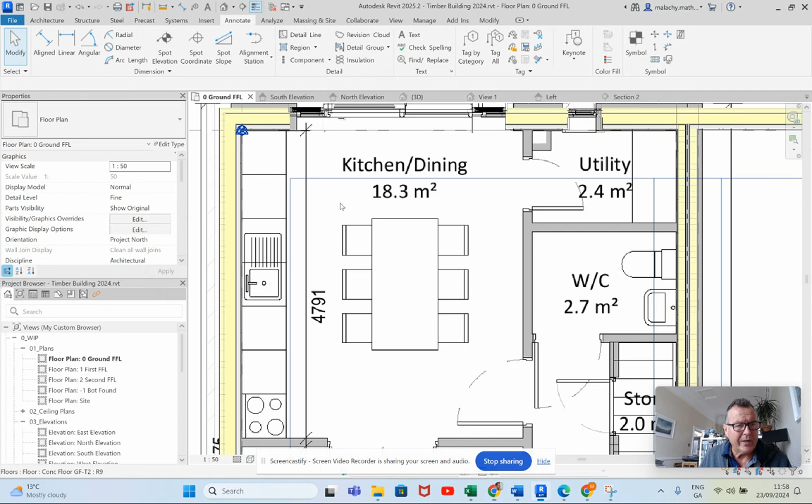Now I'm going to have a go at completing the ground floor here, so I need the internal walls and that as well. Just to let you know now, I've moved the PDF back into its position and I'm in wireframe at the moment, okay, so I can see down below the floors. I changed these windows to 450s. I changed this window to this Nordan one because the other one didn't have a sill and was annoying me.

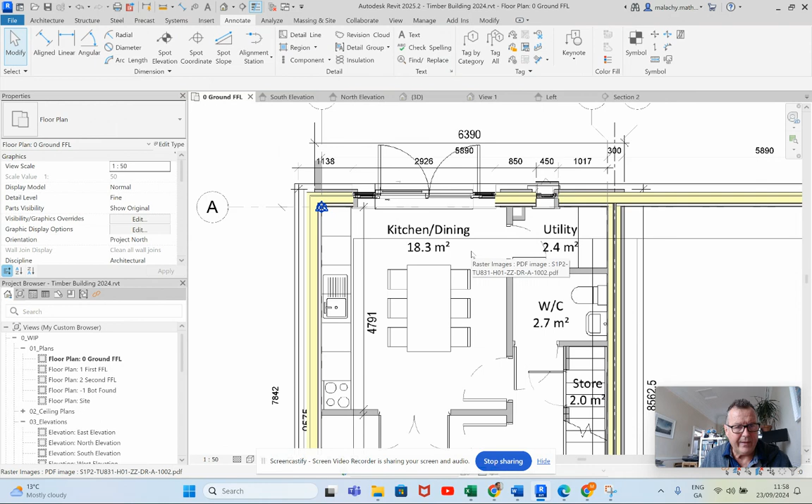Okay, that's that. Now, before I do the internal walls, I might put in the first floor here. Okay, so I've taken a dimension there, 2778. So I'm going to use an 18 plywood on top of a 200 zone for my joists. Now, they could be solid timber joists, or they could be open web, or whatever you decide to do here.

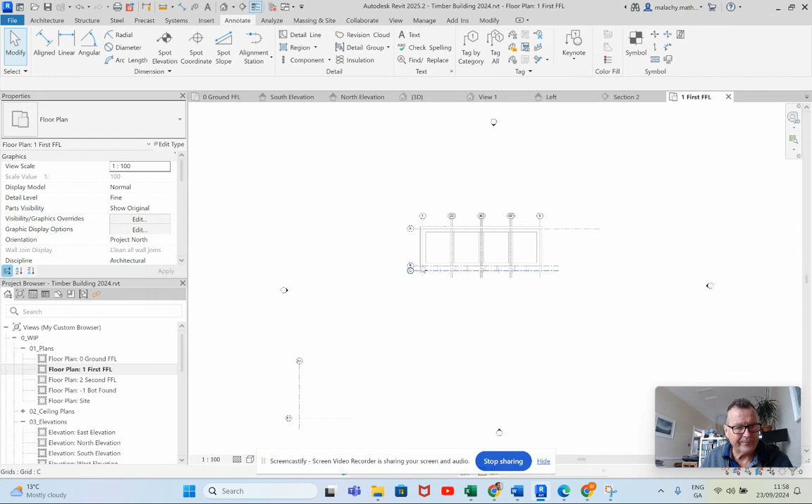So I'm going to go into the first floor plan here. Okay, and again, this is where my grids on the internal face come into their own. So I'll go into architecture and floor. Now, timber suspended floor, edit type. I'm going to duplicate this one, and okay, I'll just call it that.

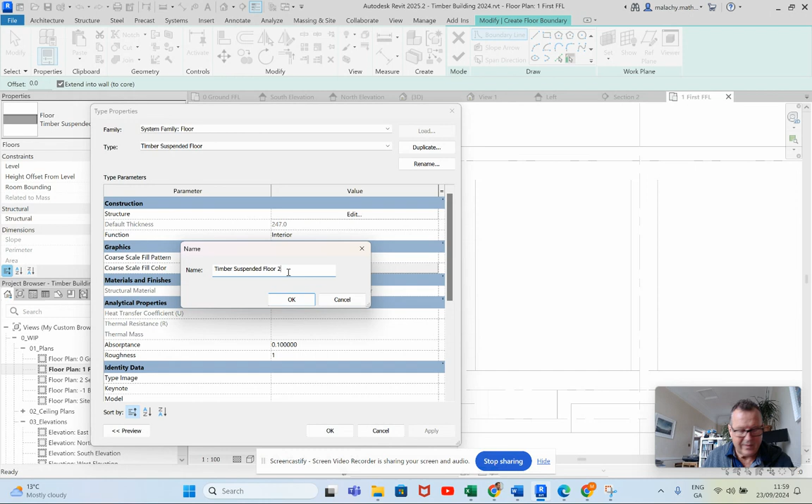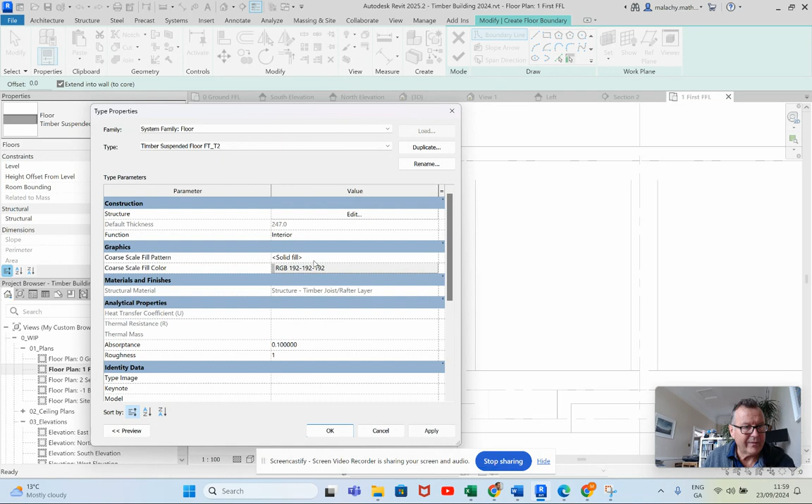Actually, I'll give it a, so it'll be floor type underscore T1, T2, which would be, shouldn't it? Okay, floor type T2. I'm going to change the coarse scale color to here, solid fill. Wood sheeting, I'm going to pick a plywood here, and I'm going to my HBA, HBA plywood. Okay, that's that one. It's going in at 18.

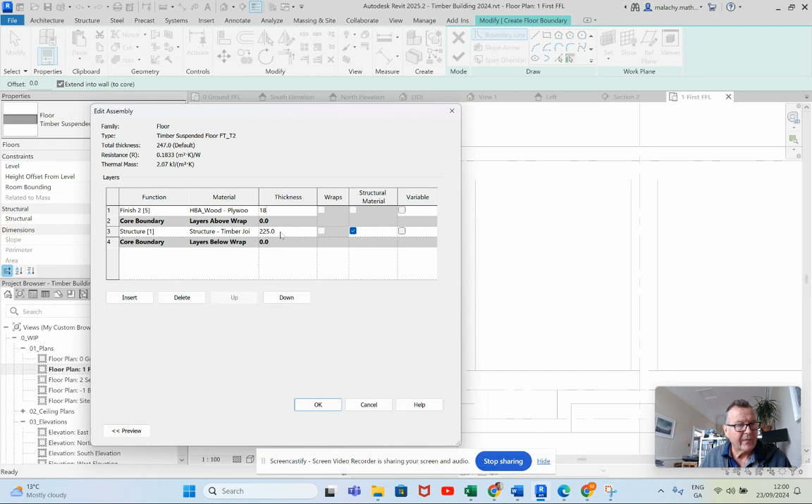And then this is going to be a structural timber zone of 200. Now, notice that I'm not putting in a plasterboard underneath that because I'd be putting in a ceiling, and the plasterboard on the underneath of the floor will not host lights, whereas a ceiling will host lights. If we get to that point of putting lights in, that's where that will come into its own.

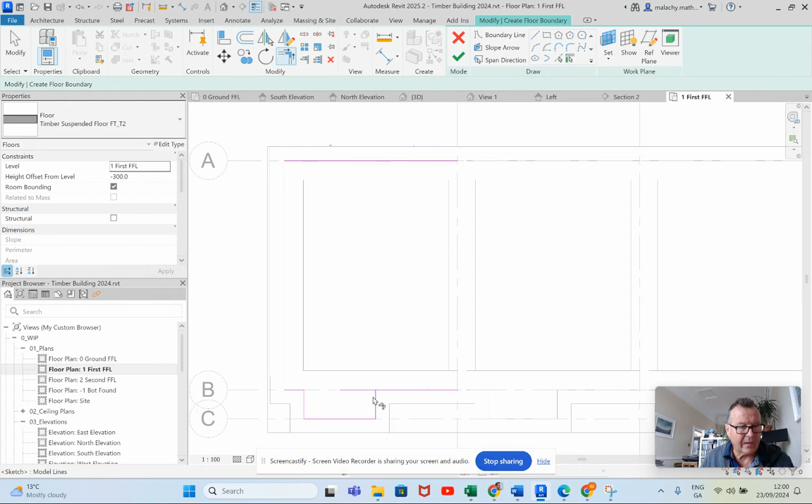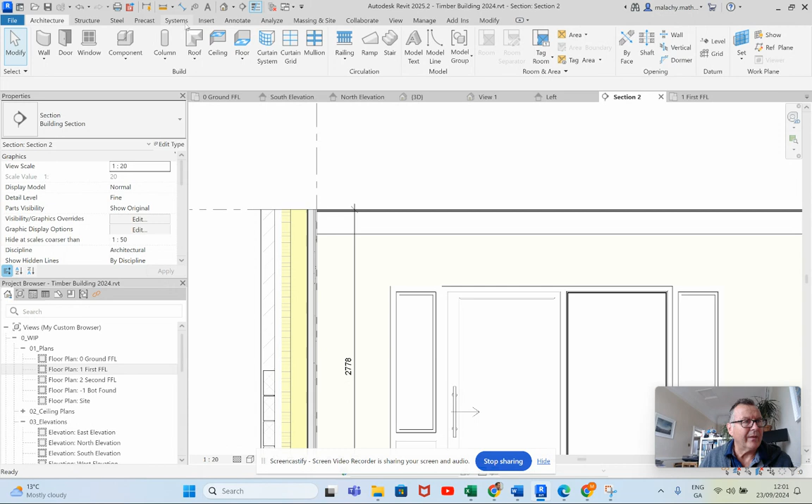Now I'll have to do a cutout here for the stairs, but don't attach. Okay, back into my section here now. Let's take a look at that. Right. Oh, I didn't change the dimension here. That's no problem. I'm going to align that now. Do this, align the top of that. There we go. Now let's just do a check on that. Just annotate. To the underside is 2560. That's grand, gives me plenty of height to play with there.

So that's that one. Now the reason I'm doing that is that this 2560, that is going to be the height of my ground floor walls. All right, so we go into wall here, and we'll pick up an internal partition stud. Okay, so I'm going to pick this one, edit, I'm going to duplicate, and I'm going to just check in here. So one plasterboard 75. Okay, so that's going to be 100 mil in total.

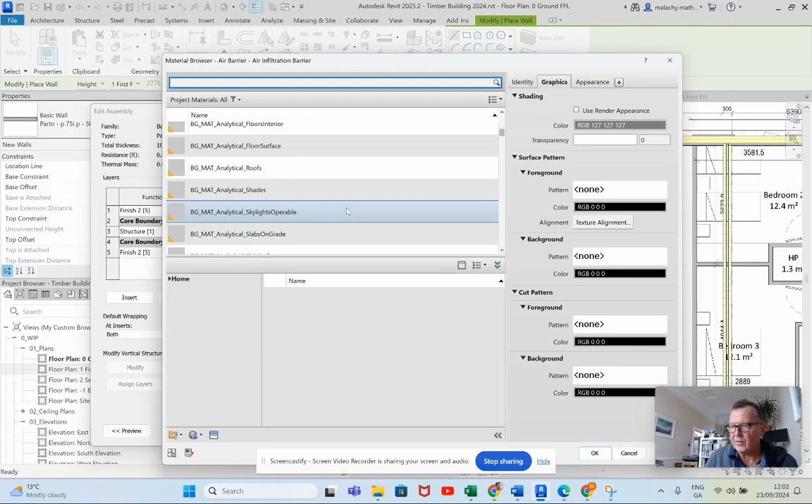Rather than air infiltration, I don't know why that happens in there. We're going to make a wood stud layer, and that has my yellow in it as well, because we probably will insulate this as well too. And while I'm at it, I'll change my plasterboard to my HBA plasterboard as well. HBA plasterboard. Okay, and this one will change as well.

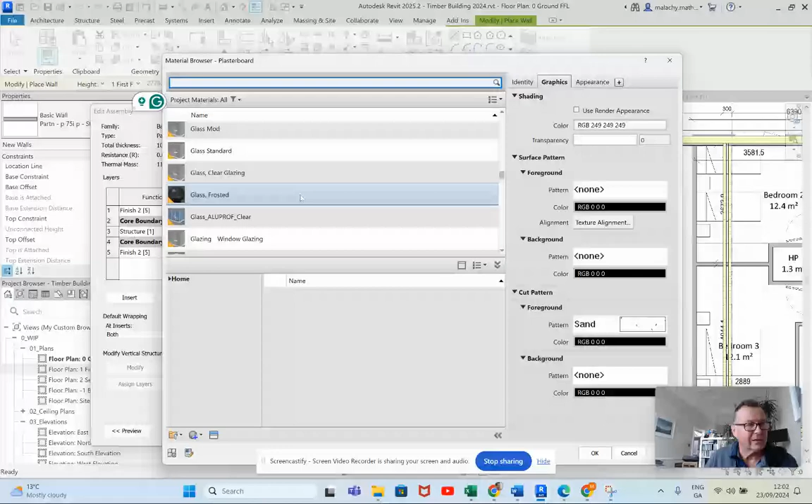You can see that a lot of time is taken up with setting these things up, and one of the secrets of Revit is, again, having all these already made, so they just need to choose them and get straight into the modeling. And that's where your template comes into its own.

And I know you're doing an exercise with Tom at the moment in which you're building your template. We do that specifically so that you have the skills now to develop your own template with your own walls, with your own floors and everything else like that, with all of this kind of stuff already set up, so it's not taking up modeling time as such.

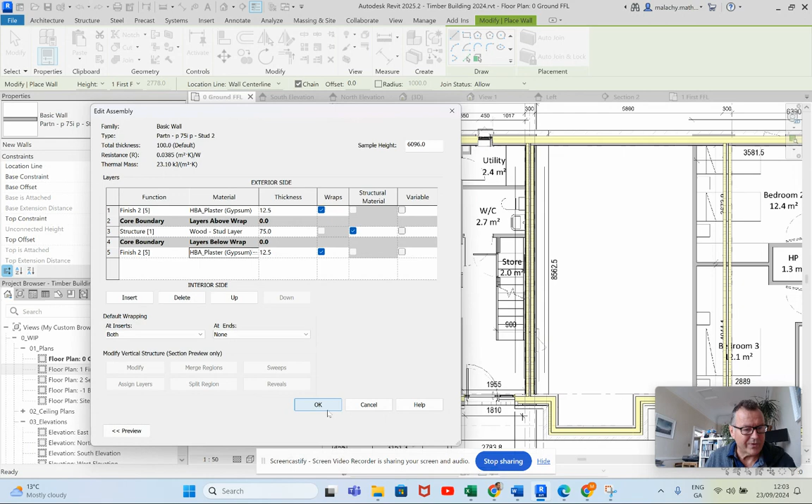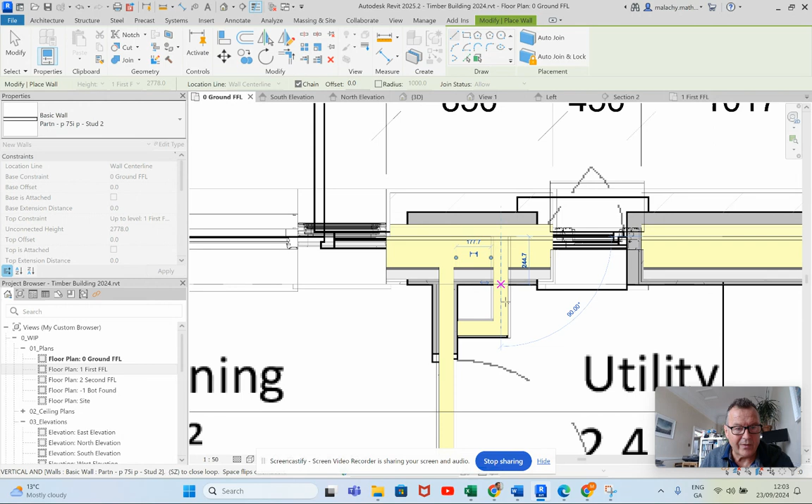Okay, that's good. Now we'll do wall center line here just for the moment, and I'm just going to lash these in. Now let's just get in as far as there. I'll come back to that. It's penetrating through. Okay, so we need to do that. That's just a little service corridor there. Across here, I like to get these in, and then I'll put some dimensions on it, and I'll adjust from there.

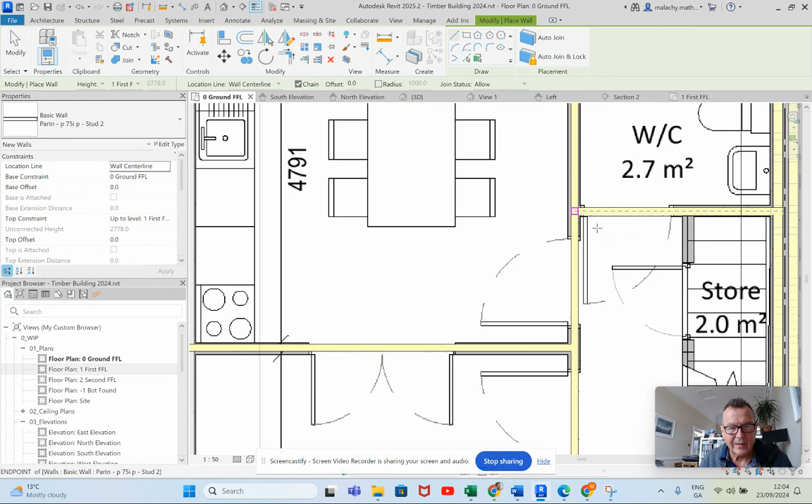Okay, escape ones. Now this is one that will more than likely change because it'll depend on the position of the stairs as such. Yeah, I'll go the whole way with this. I will have to adjust that one, I know. Now there's all my internal walls in. So escape. Now I don't think that's going to happen here, so let me just check this to see.

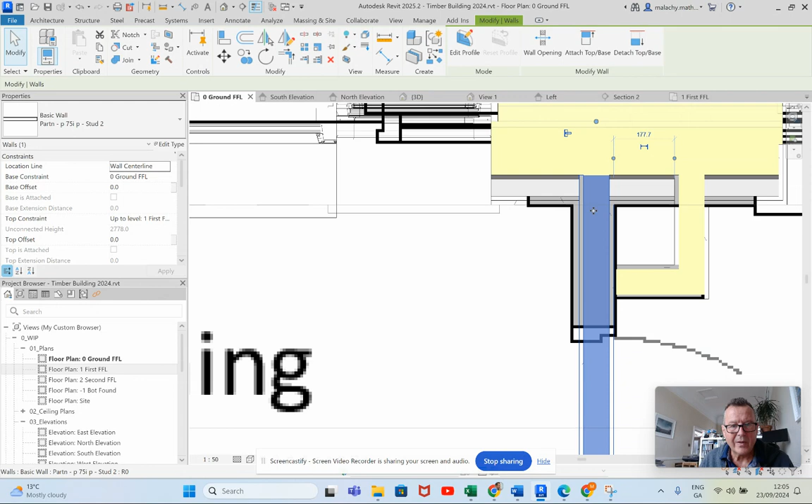Now I can disallow the join, but I'm just going to check the... okay, so the core boundary is around that. If I move the core boundary up, will it stop that? Don't think so. Oh, it has. It's gone in as far as there. That's probably right, maybe. Okay, something like that. Right. Okay.

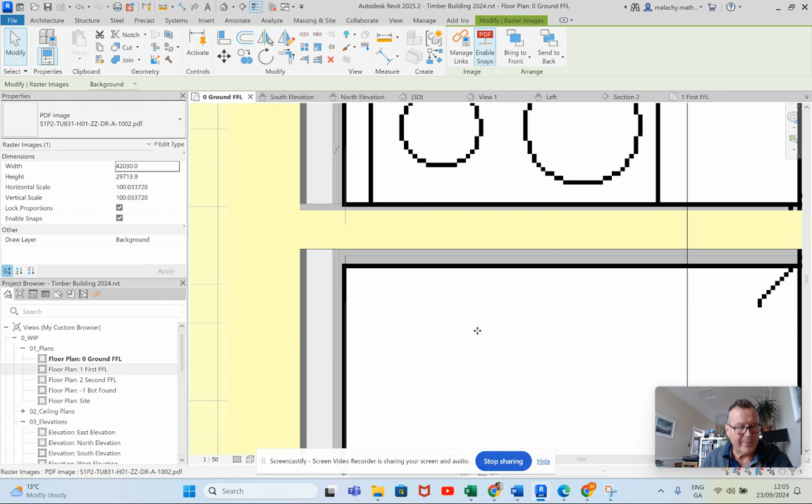And again, that is a service cavity as such there, but you can see the way the plaster boards are coming around the corner. That one is not. So I'm going to go check this again. Let's just keep an eye on that one there. Let's go back in here, and let's just move this core boundary down one. Okay, let's see if it has any effect there.

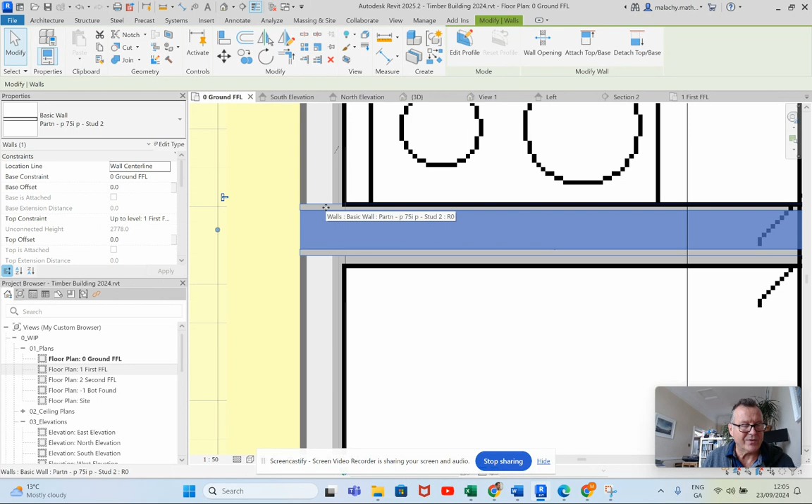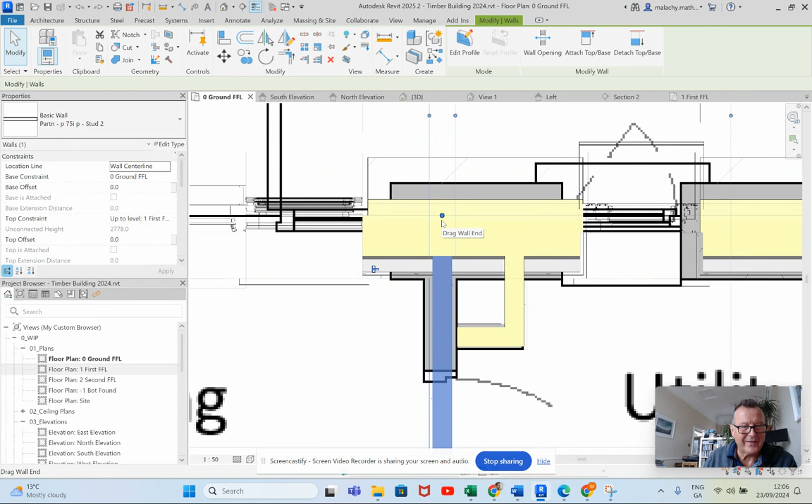No, it's brought both of the plaster boards through. Okay, so if I undo that one and undo that one, what I should have is my two plaster boards meeting up there. All right. Okay. I just don't think the wall needs to penetrate through right to here, though. That's annoying me. Disallow join.

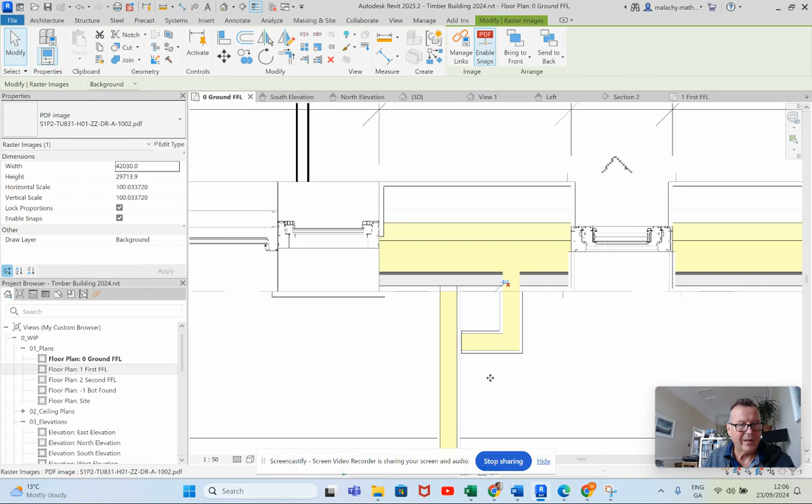Let's go back into hidden line here. Yeah. So I need to actually pick that and just pull that back as far as there. Alright. Now that's probably better. So that one is done already. Okay, see what I mean about kind of just double checking these things here.

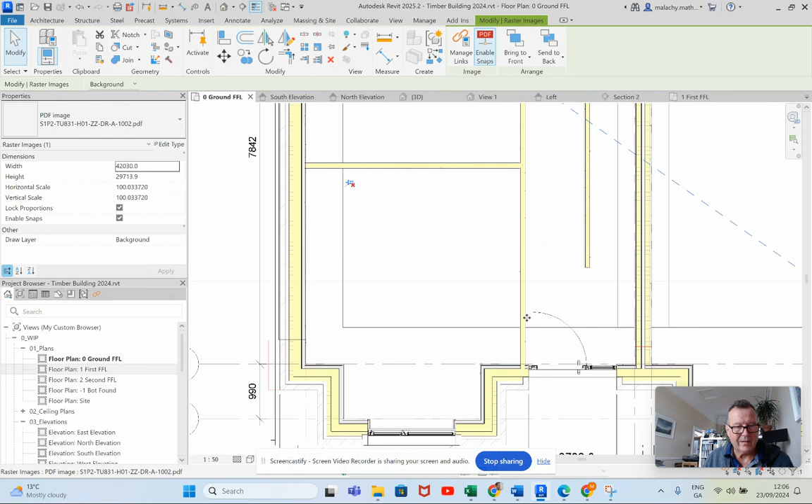Disallow join, pull that back to the second plaster line. And we'll do the same here. Disallow join, pull that back to the second plaster line. Now at least you have these editing tools that will allow you to do this messing around to get it right, but get it right here, and your construction drawings will look the part as well. Okay, now I'll pop in a few doors and the other bits and pieces here.

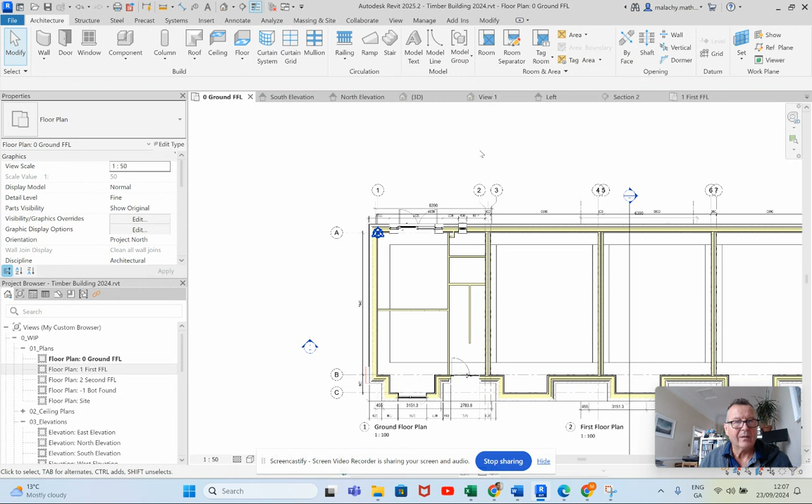Right click, select all instances visible in the view, and we didn't want to go up to there, did we? We wanted a top offset of minus 218. Apply. Why are we doing that? If we're going to the section here now,

okay, so that wall you can see now is coming to the underside of that one there. It creates a closed boundary, so I can put in the ceiling, and it's not penetrating through, as it wouldn't anyway, in the wall there. So that's what I worked out that dimension for. Okay.